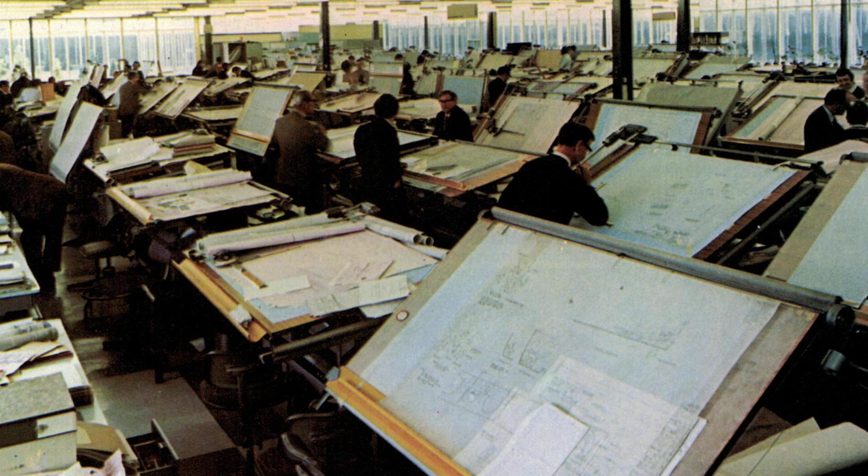In 1966, a handful of engineers promised they could build the tallest skyscrapers on Earth while using half the steel the Empire State Building needed, an idea so radical most experts called it reckless, even dangerous. Yet with the force of politics and Rockefeller money behind them, the Twin Towers weren't just approved. They became the world's largest untested structural experiment, right in the heart of New York City.

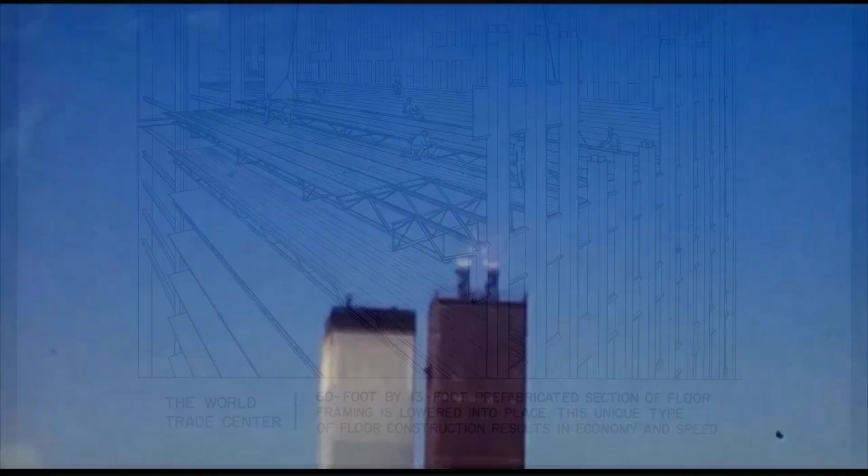This is the untold story behind how the Twin Towers were really built. A race where ambition eclipsed caution, 30,000 people lost their livelihoods, and thin steel walls held up ambitions as vast as America itself. If these towers rewrote every rule of skyscraper engineering, why did the world never follow their blueprint again? The real answer starts here.

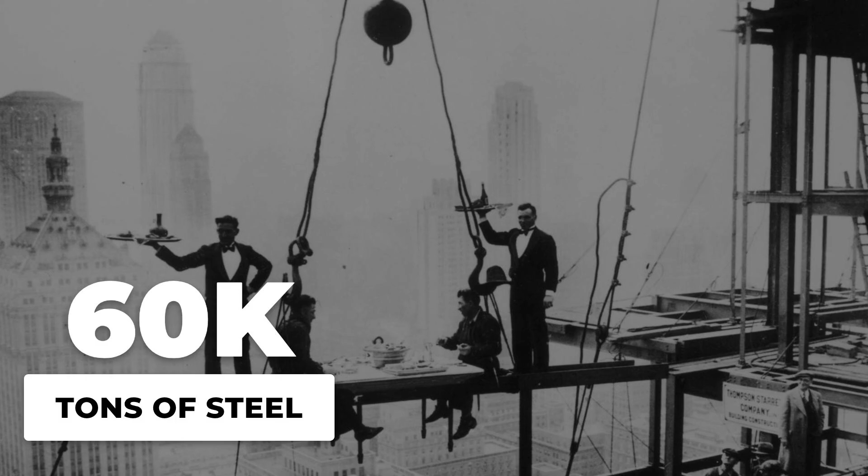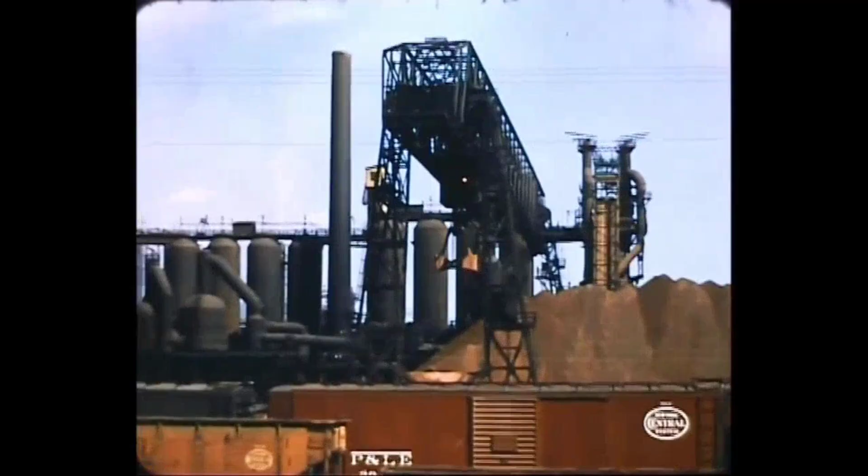The numbers didn't add up. The Empire State Building, that steel titan of the 1930s, needed 60,000 tons of iron and muscle to reach 102 floors. Now, on paper, the World Trade Center towers were supposed to rise higher, 110 floors each, using just 42,000 tons per tower. That's a third less steel for a bigger, heavier building. The claim sounded like a misprint.

Engineers across the country shook their heads. You can't cheat gravity with optimism. You can't build higher with less and expect the wind, the weight, and the unknown to play along. In 1966, the proposal landed on the desks of New York's engineering elite. They read the numbers, checked the ratios, and reached for their red pens. The old formulas dictated thick columns, a dense skeleton, weight everywhere.

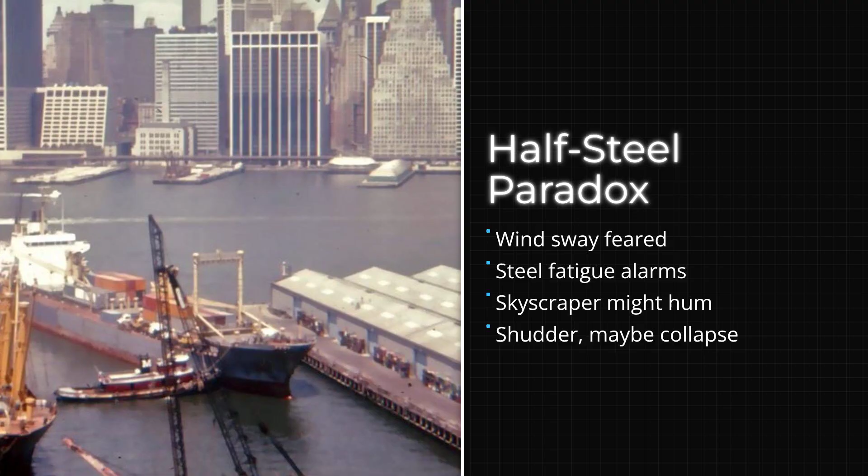But the new plan called for something else. Thin steel walls, barely an inch thick, would do the heavy lifting. The rest, open space, endless glass, would be suspended between them. Critics called it reckless, even suicidal. Letters to the Port Authority warned of wind-induced sway, steel fatigue, and a skyscraper that might hum, shudder, or worse. One consulting engineer wrote, "No precedent exists for such a structure. The margin for error is razor thin."

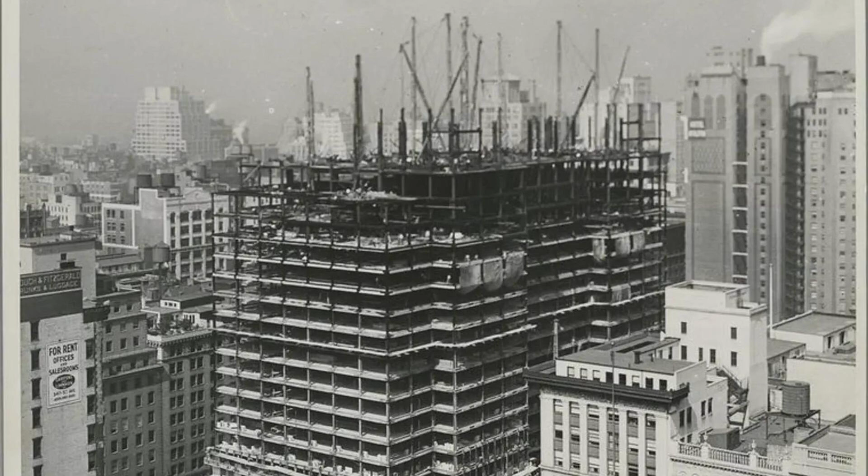Yet the project wasn't stopped. The promise of half the steel and half the cost overruled the chorus of doubt. The towers would rise not because everyone agreed they should, but because the people in power decided they would. Every calculation, every warning, every sleepless night, none of it slowed the momentum. The world was about to watch an untested idea become the tallest thing on Earth.

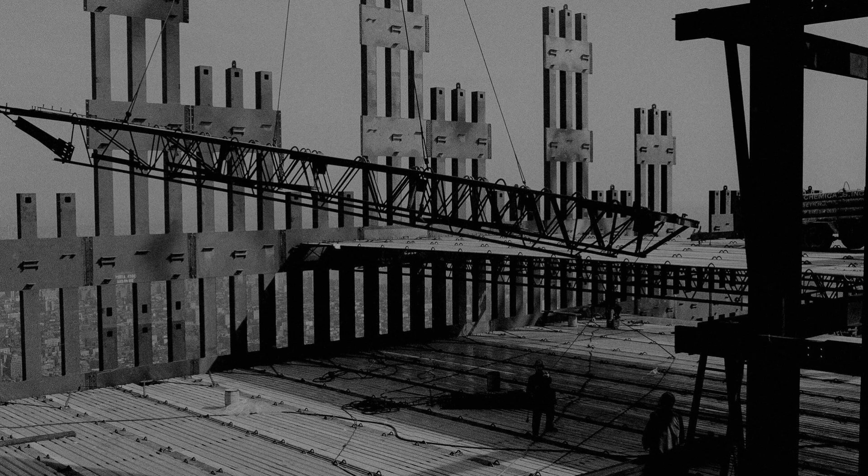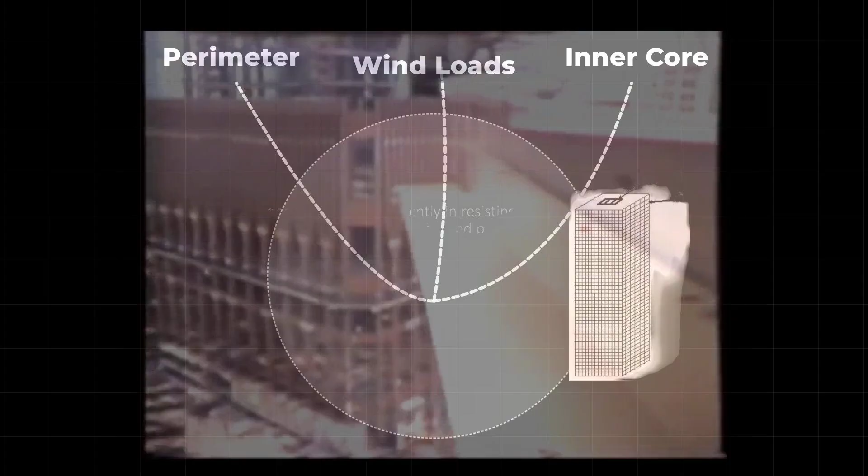Minoru Yamasaki's blueprint looked like science fiction. Instead of a forest of columns, he drew two hollow rectangles, each ringed by 236 slender steel columns spaced just over 3 feet apart. These columns weren't just decoration. Welded together with deep steel spandrels, they formed a rigid shell. The building's bones, not its skin. The idea was simple and radical. Move all the strength to the outside. Let the walls, just an inch thick, carry the weight and fight the wind.

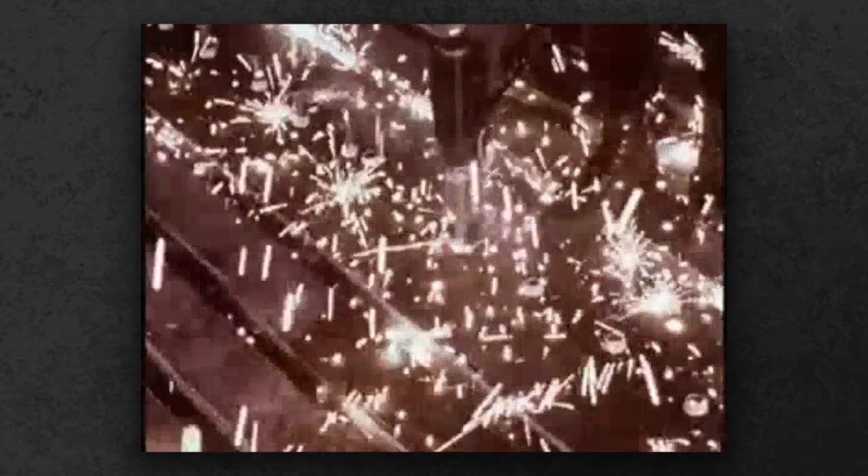The interior core would house elevators and stairs, but the floors themselves would float, open, uninterrupted, 40,000 square feet at a time. For tenants, it meant endless space and sweeping views. For engineers, it meant betting everything on a theory no one had tried at this scale. Leslie Robertson, the lead structural engineer, ran the numbers again and again. Wind tunnel tests in Canada, computer models, full-scale prototypes, every tool they had they used. Still, the old guard scoffed. No skyscraper had ever trusted so much to so little steel.

But the Port Authority, under Austin Tobin, was looking for a reason to say yes, not no. David Rockefeller, the city's most powerful banker, wanted a monument to American ambition. When New Jersey's politicians balked, the Port Authority offered a deal. Take over the struggling PATH train, swallow its losses, and win the votes needed to build. The subsidy was buried in the paperwork, but it worked. With the political machinery in motion, the World Trade Center was greenlit. The tube-in-tube experiment would become reality, no matter the risk.

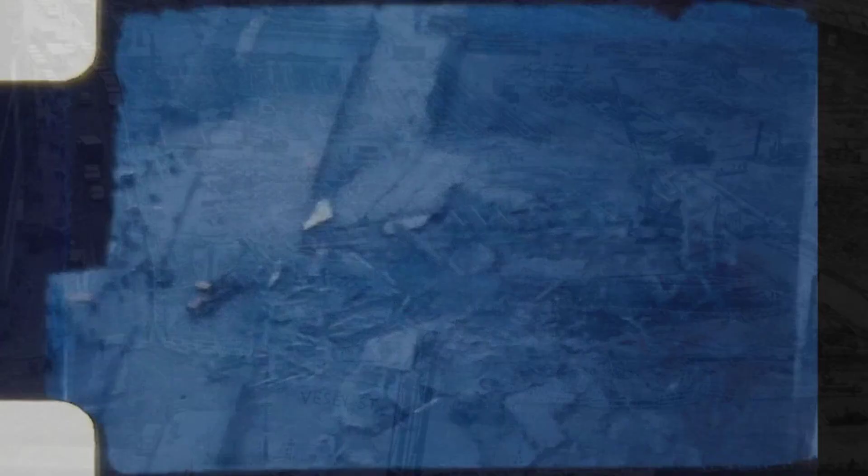Radio Row was gone by noon. 300 businesses, some with neon signs older than the Port Authority itself, were swept aside for progress. Oscar Nadel, who sold vacuum tubes and transistor radios on Cortlandt Street, led the resistance. He filed lawsuits, rallied shopkeepers, and staged parades for the press. But the bulldozers didn't pause. By the end of 1966, a neighborhood that once pulsed with the hum of commerce was stripped to bare dirt. 30,000 workers scattered, their livelihoods erased by eminent domain.

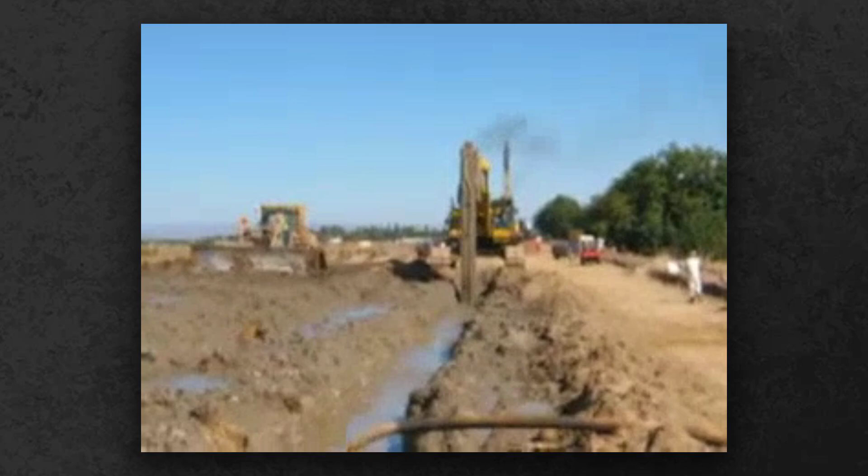The empty block became a pit, 70 feet deep, right beside the Hudson River. That's where the next gamble began, the bathtub. Engineers needed a way to keep the river out while digging down for the tower's foundations. The solution was borrowed from Milan, a slurry wall built panel by panel, each trench filled with bentonite clay to stop the sides from caving in.

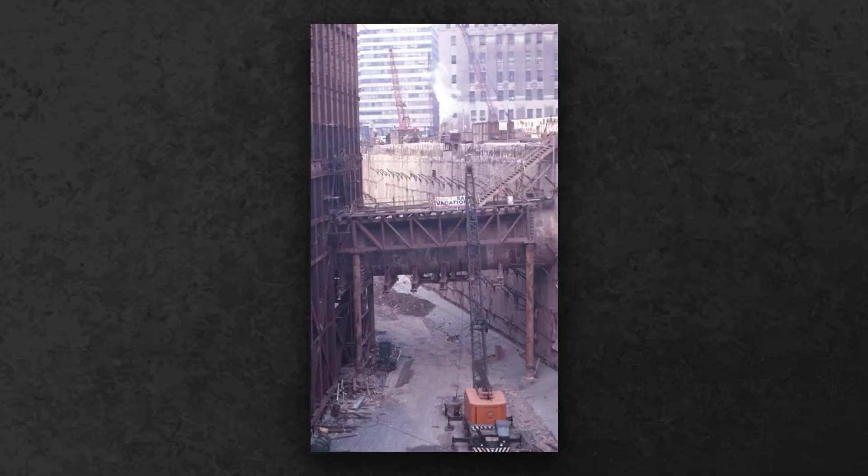Only after the steel cages were lowered did workers pour concrete from the bottom up, forcing the slurry out and sealing the wall. In January 1968, disaster nearly struck. A breach opened in the unfinished slurry wall. Hudson River water surged in. If the wall failed, the river would flood not just the site, but the subway, the streets, everything below Canal.

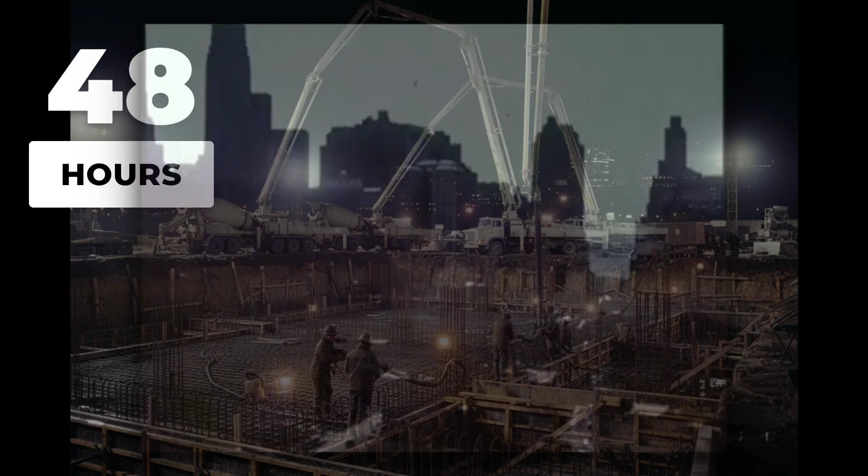For 48 hours, crews worked non-stop, pumping concrete, driving steel, racing the tide. They held the line. The site was saved. The cost, millions over budget, months lost, was measured in dollars. The cost to the city, if they'd failed, would have been unthinkable.

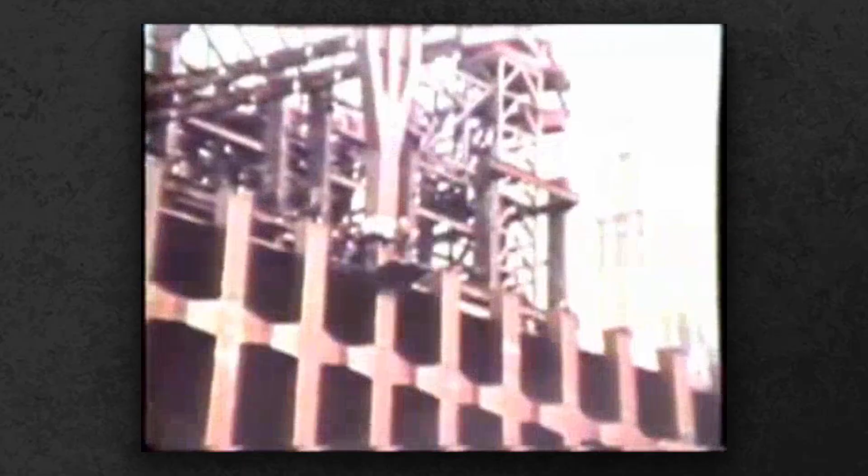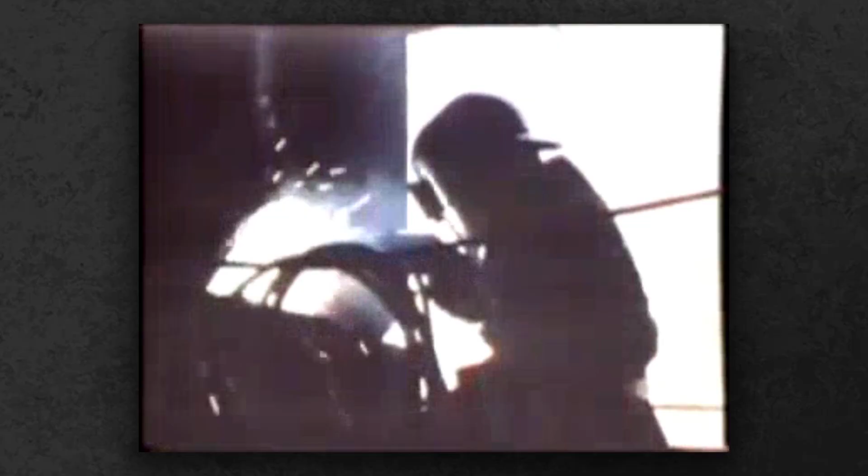Steel arrived not as raw beams, but as precision-made modules, each one a slice of the tower, 14 inches wide and just an inch thick. Welders and ironworkers set these panels side by side, every 3 feet, climbing higher with each new row. The columns locked together, spandrels welded tight, forming a continuous shell that could flex with the wind instead of fighting it.

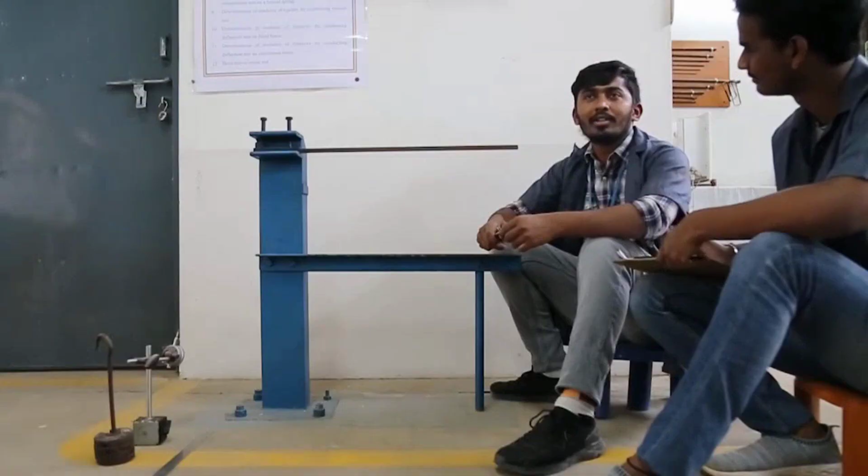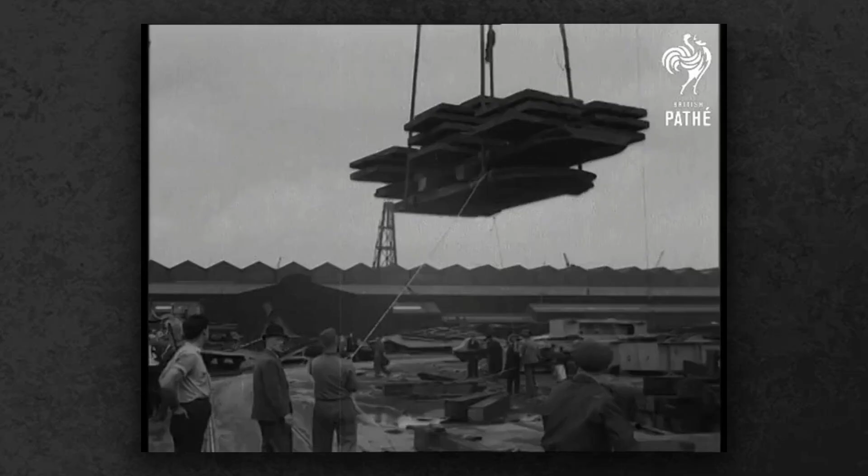To keep pace, construction crews used cranes that climbed the building as it grew, inventing new methods to lift steel and concrete faster than any city had seen. The rhythm was relentless: bolt, weld, check, repeat. But height created a new challenge: how to move 50,000 people up and down 110 floors without filling half the building with elevator shafts. The answer was the Sky Lobby.

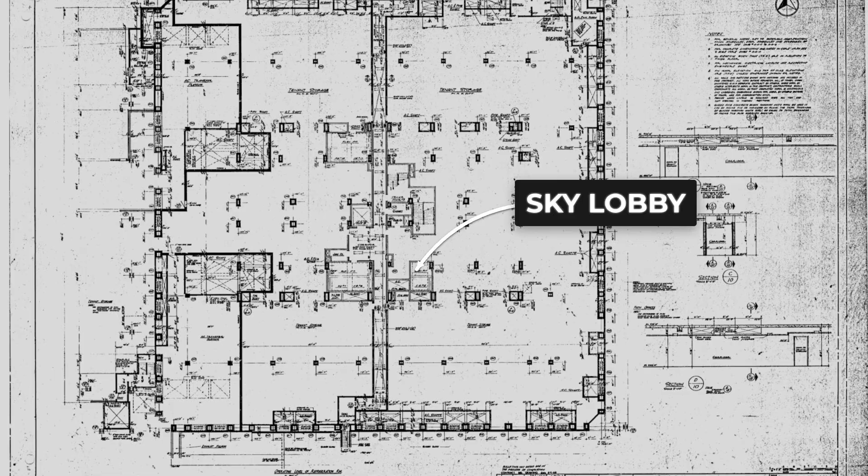Instead of one endless ride, express elevators shot to transfer floors, giant lobbies in the sky where passengers switched to local cars. Two sky lobbies per tower, one on the 44th floor, another on the 78th, turned vertical travel into a subway system, freeing up valuable space for offices and giving the towers their signature open interiors. The result was a vertical city, engineered to rise, bend, and breathe with the wind.

The towers opened to fanfare, but the crowds never came. For years, entire floors sat empty, sunlight bouncing off bare concrete where tenants were supposed to be. By the end of 1974, less than half the space had been leased. Some reports put occupancy at just 37%. The private sector stayed away, put off by high rents, elevator confusion, and the sheer scale of the gamble. The Port Authority, once landlord to a city's ambition, found itself managing a white elephant.

To fill the gap, government agencies stepped in. The General Services Administration and New York State signed massive leases, taking over 1 million square feet by 1976. Only then did occupancy finally creep above 50%. For all the talk of progress, the world's boldest towers needed a bailout just to stay half full.

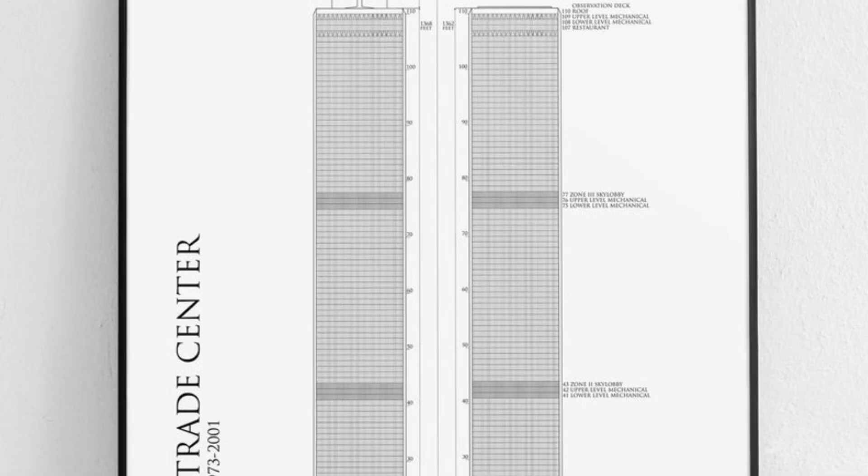The world took notice. In 1973, the Sears Tower in Chicago opened its doors, taller than the Twin Towers, but built on the same principle. A rigid tube of steel at the edge, open floors within. Fazlur Khan, the engineer behind Sears, credited the New York experiment for proving what was possible. From that point on, the tube-in-tube system became the blueprint for supertalls everywhere. Petronas Towers in Kuala Lumpur, Jin Mao in Shanghai, Burj Khalifa in Dubai. Each one a direct descendant of the World Trade Center's gamble.

But the legacy wasn't just about height. After September 11th, every building code in America changed. Wider stairwells, more fireproofing, extra redundancy. Modern skyscrapers are safer because of what was learned and lost in those towers. The Twin Towers' bones run through every skyline now, a silent lineage of risk, reward, and the lessons written in steel.

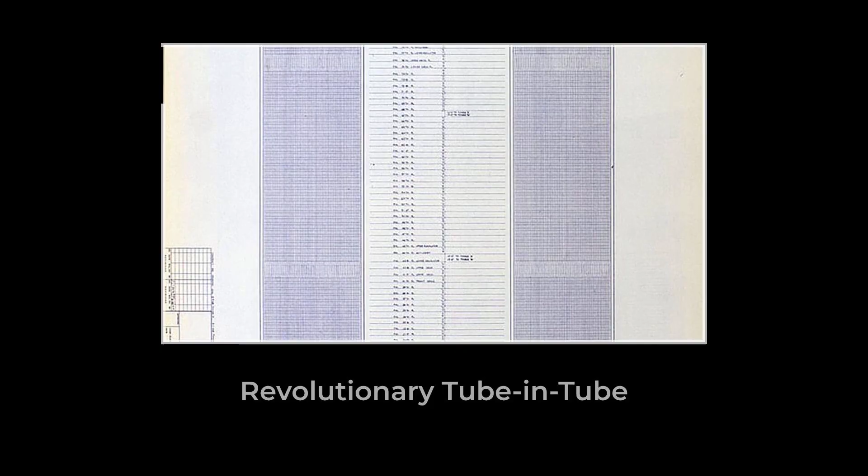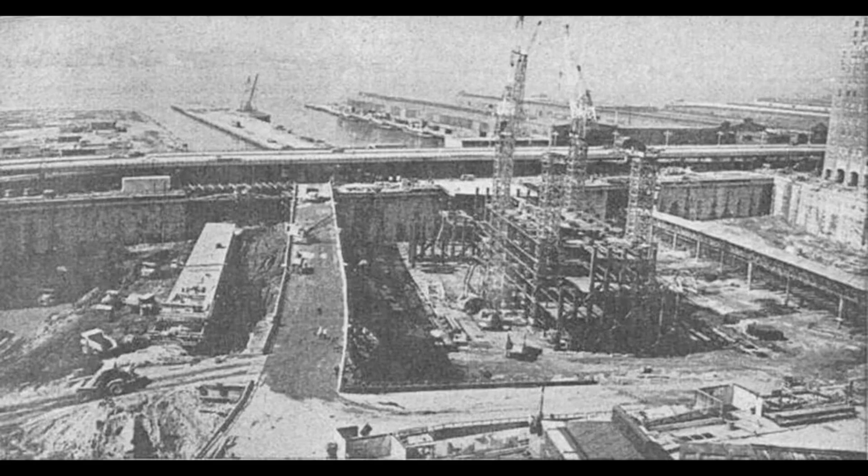In 1966, the World Trade Center's designers proposed building the world's tallest towers using just 42,000 tons of steel, nearly a third less than the Empire State Building. This radical approach, powered by the tube-in-tube structure and 236 perimeter columns, faced fierce skepticism and political resistance. Backed by the Rockefellers and the Port Authority, the project displaced 300 businesses and risked unprecedented engineering challenges, from deep slurry walls to cranes climbing 110 stories.

Despite these hurdles, the towers stood as proof that ambition and innovation could reshape a skyline and an industry. Yet not all costs are fully documented. The long-term health of displaced communities and some details of internal debates remain unclear.

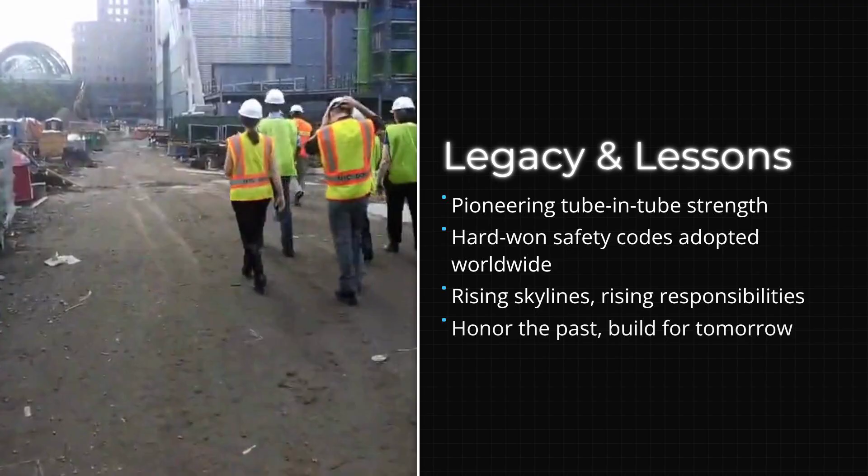Today, every supertall building carries lessons from the Twin Towers, adopting their structural advances while enforcing stricter safety codes. The evidence shows the Twin Towers changed global engineering, but also marked the end of an era when risk and vision overruled caution. Their legacy is visible in every modern skyscraper that dares to reach higher.